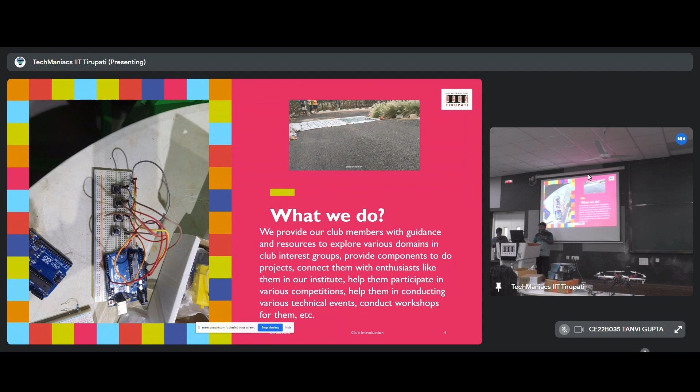The projects we do are open for all, so anyone who wants to join can freely join and learn the skills. We also provide a platform for students to collaborate, so they can work with veterans in that field and gain a lot of skills through hands-on experience. We help students develop technical skills regarding robotics and electronics. Our mission is to induce a technical culture in our institute and boost innovation.

This is the organizational chart of Techmaniacs. I am the co-coordinator, Chirag Kotian — I forgot to introduce myself. There are four interest groups: Arduino interest group, electronics interest group, robotics interest group, and drones interest group. This workshop is for the drones interest group.

We have a head of the drone interest group, Rohit, and under him there are a few co-coordinators who have some tasks assigned to them. Under this is our core team. There are also members in Techmaniacs — a member is anyone who does projects or issues components from Techmaniacs. If you are interested, you can be a member; there is no restriction in that.

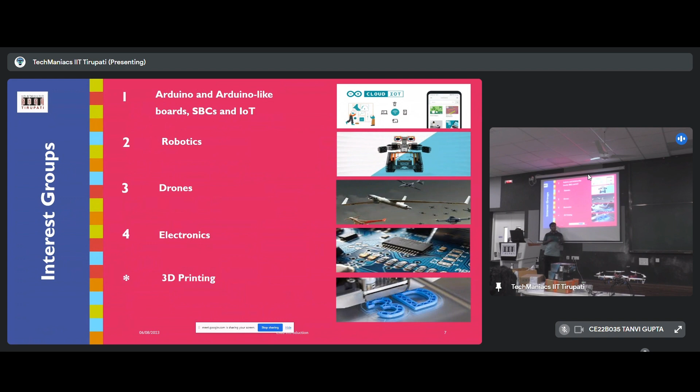As I said, there are four interest groups, and there is an asterisk next to 3D printing because earlier 3D printing was a separate interest group, but we thought 3D printing has become such an important skill nowadays that everyone should learn it. It would be very helpful for making projects, prototyping, anything.

These are our co-coordinators, and you can see their roles. If you want to issue components and do a project under a certain domain, you can contact the respective person. If you have a new project and want to initiate it, you can contact me or the interest group head.

We are also trying to make a document repository of project documentation, so in future if anyone wants to start new in this field, or work upon a project done in the past with advancements, they can refer to that documentation. We will soon release the link to our GitHub repository, where you can find a few projects. It's small now since we started it this year, but as years pass our repository size would increase.

So, how can you be a part of the club? This year's core team member selection is done, so no worries, but you can join us as a member. The benefit of being a member is you will learn from people who have experience in that field. Not only that—

You all know that this December there is the inter-IIT competition between IITs. If you are a good participant in our club and work hard, and the interest group head is impressed with you, he can recommend your names to the selection committee, which can directly select you for problem statements related to inter-IIT. This year's inter-IIT is very hard — it has been promised by IIT Madras that it would be very hardware oriented. So being part of our club will be very helpful in that sense.

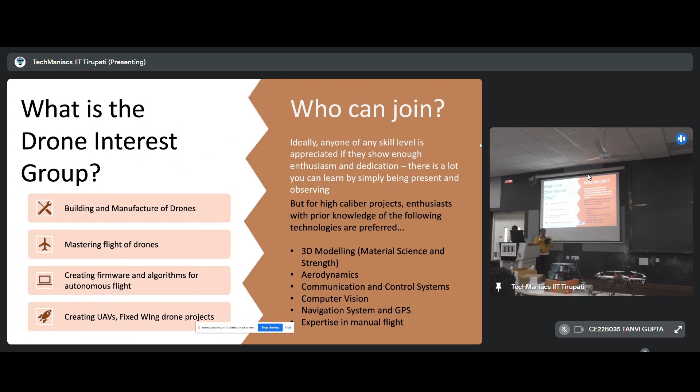And if you guys have some experience in 3D modeling, aerodynamics, communication and control systems, computer vision, navigation systems, GPS, or expertise in manual flight, you will be able to help in the drone projects.

Our mission is to create 4 to 5 projects for IIT Tirupati, and to reach out to some local companies and startups to work upon the projects. First, we will try to reach the inter-IIT projects and all that, to make innovations in the field of avionics and aerospace.

Some of the projects are disaster response. Disaster response is like, we will see what the problem is, and the drone is able to run in those harsh conditions to see the victims and even deliver some aid to them.

The second one is data collection, like wildlife areas, collecting data about the wildlife areas and all. The third one is flight avionics, communication relays, automatic flight, and communication systems.

So when we make projects, we get inspired by a lot of our peers. Newton said he only got that far because he stood on the shoulders of giants before him. So we are also inspired by a lot of projects by foreign universities and other bigger institutes. I wanted to share a video of a drone by ETH Zurich that interested me a lot. I hope you can also get inspired by it.

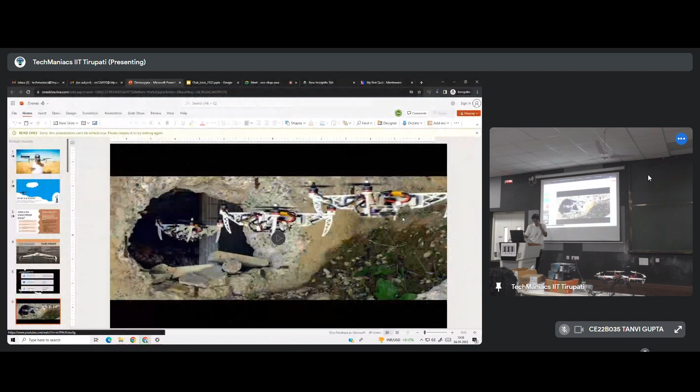Okay, so you can see the video. That's me. That's Prakhar. We made a quadcopter in the second semester, a similar concept.

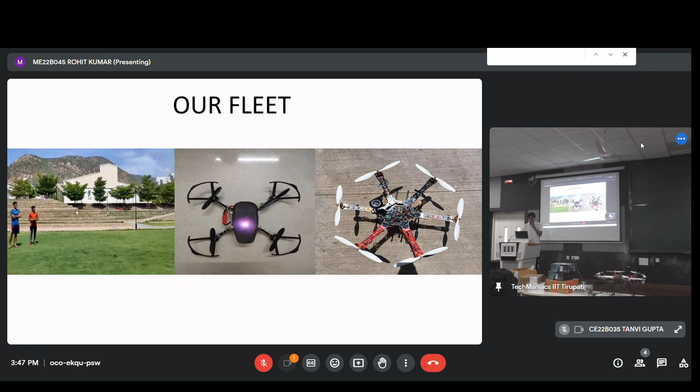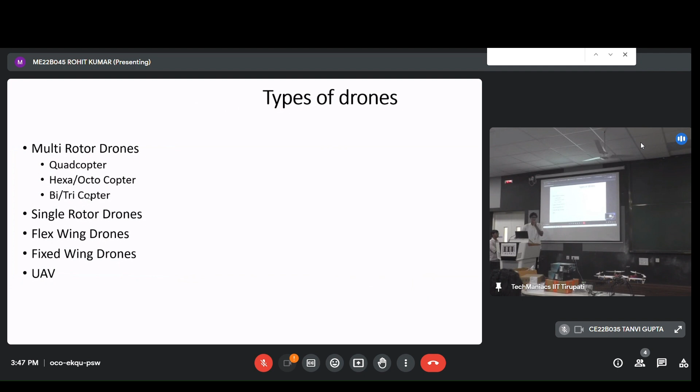There are many types of drones we can make. The most common ones are multi-rotor drones, single-rotor drones, flex-wing drones, fixed-wing drones, and UAVs. They have different uses depending on the use case. Multi-rotor drones are very basic to make and can fly in many circumstances. Single-rotor drones conserve battery and fuel a lot.

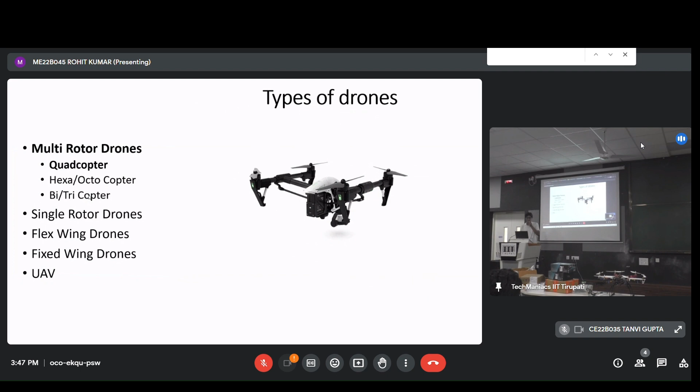They conserve battery and fuel a lot. Of the multi-rotor drones, the quadcopter is the most common type. When you think of drones, the first thing you think of is the quadcopter itself, because it can be modified and made to work under many circumstances.

There's also hexa and octocopter drones. They are a lot bigger and can lift a lot of weight. Other than that, there's also tricopter drones and bicopter drones. They are small, and can be very nimble, very agile.

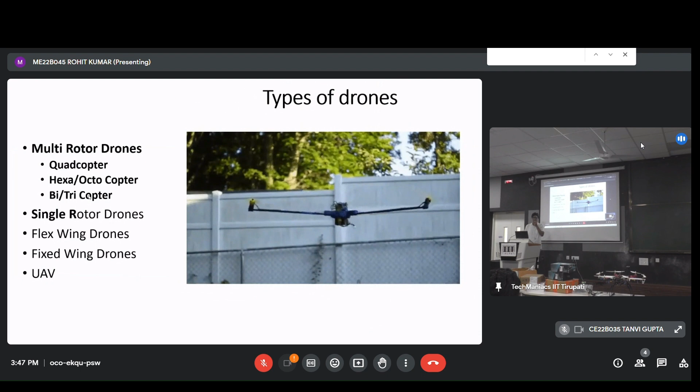Single rotor drones can conserve a lot of battery. They can be made to fly with an engine, that's why they're used for military purposes also.

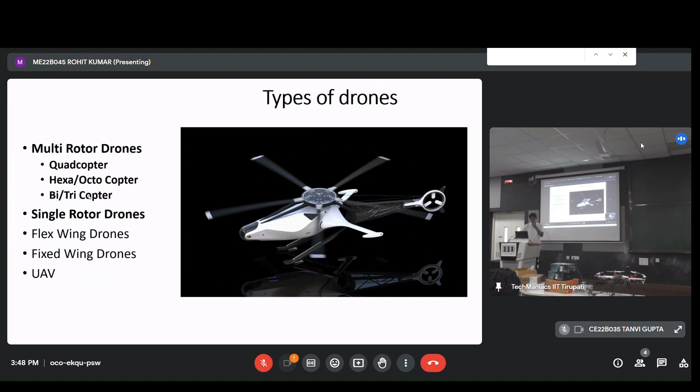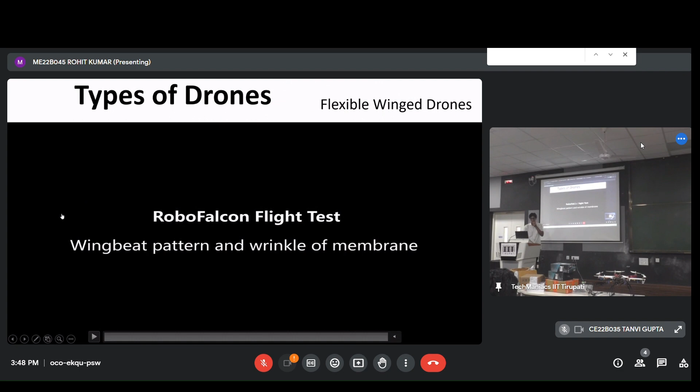Now, flexible wing drones. They are a really interesting project, usually made by research projects. I'll just show you a video to explain how it works.

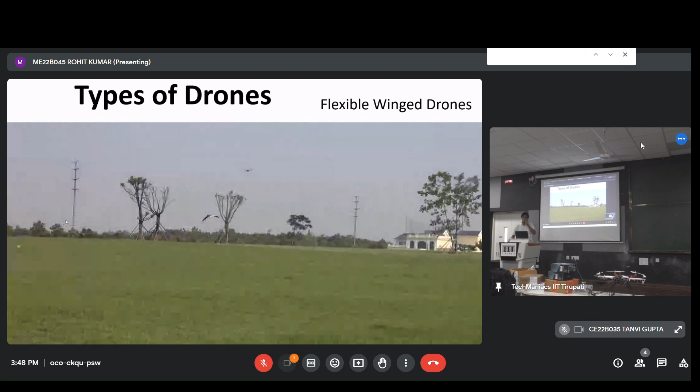So you might have seen Uri the movie. The drone in Uri the movie, that was a flexible wing drone. They can be made to fly among birds because birds aren't distracted by them and they can be camouflaged very well.

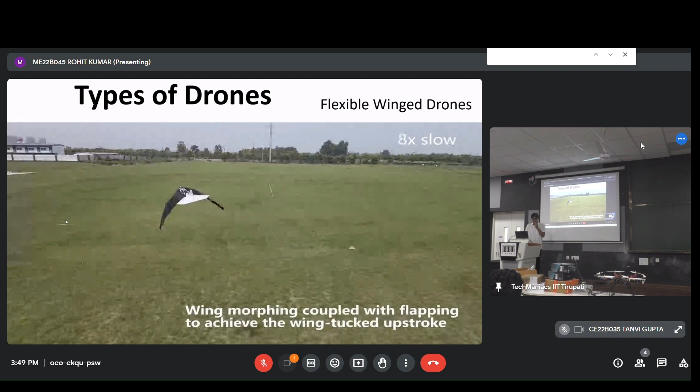Fixed wing drones are basically like a plane. When you think of drones, you normally think there's a spinning propeller, but fixed wing drones function basically like planes - there's one propeller in the back, and the rest is driven by the wings itself. The lift force is generated by the architecture of the wings.

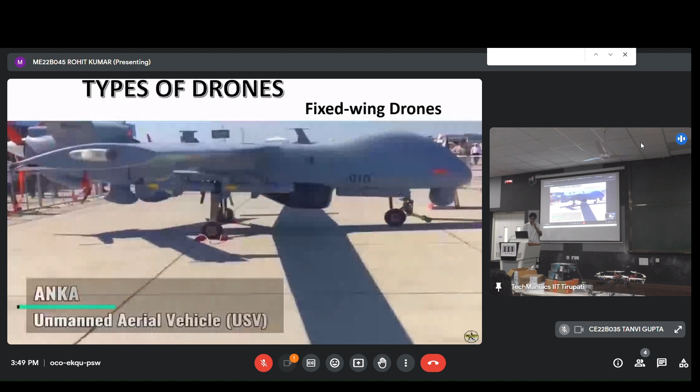I guess we will show you the videos later because the Wi-Fi really isn't collaborating with us.

They can be made to work under floods. There can be many purposes of search and rescue drones, this is not the only one. They can be made to locate victims, and provide medical aid to victims, packages like that.

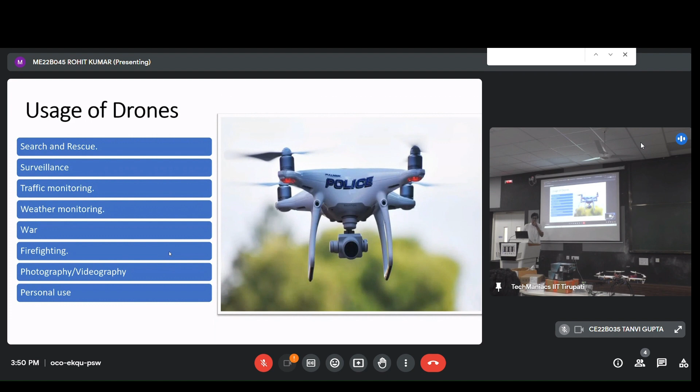This one is a bit dystopian, but in the future you might see police use drones. I think they already use drones in many high risk areas to monitor areas where crime might potentially be happening, where we don't want to assign a police unit to it.

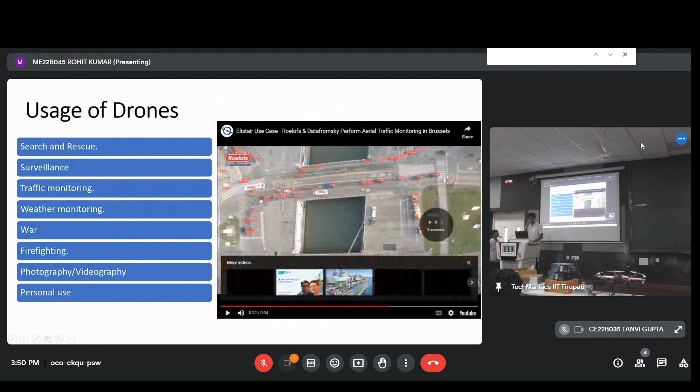One of the other uses, NASA has made this drone - it's a repurposed military UAV, repurposed by NASA. In the USA, every year there's a hurricane hitting, so NASA uses it to live track the hurricane. It can fly within the hurricane itself, so it has a body that's rigid and strong, built to fly in a hurricane. It can provide live real time data tracking of affected areas, and better research on the kind of damage the hurricane is doing.

In the Russia-Ukraine war happening right now, drones are playing one of the biggest parts in achieving air superiority without using a big military jet plane, because those are very expensive, right? But we can use drones to take space in air control.

Now I can't show you a picture of war because that's not ethical - we can't show you a picture of war during a TechManiacs meeting. So I'll show you some Call of Duty footage instead.

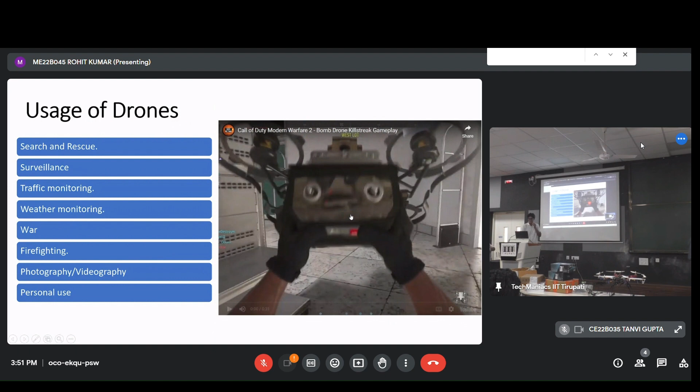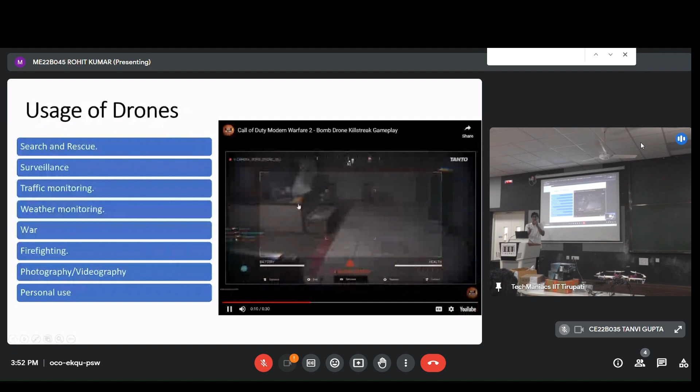Yeah, we will skip the videos, we'll share them with you later on. But I think a lot of you play Call of Duty already. There's a UAV drone in Call of Duty, right? Yeah.

So firefighting - this one is again a video, I'll probably not play it.

They made it to autonomously detect fires, and it's powered by a pipe - powered by the fire hose. The thrust isn't generated by the motors; the motors are only there to provide direction to the pipe. The thrust is provided by the opposite reaction from the force of the pipe, the water thrusting through it.

So it's connected to a fire truck. It can automatically fly to the highest story and fight fires from the top down. Currently, we have to supply firefighters from the bottom up, which can take a lot of delay in saving people who are high up in the upper stories of a multi-story fire. If the fire breaks out in a multi-story building, drones can help people who are in the upper floors as well. Now the next video is - how many of you have seen the freshers introduction video?

Yeah, they have a DJI photography and videography drone built specifically for this purpose. They take many shots of our campus like this. Even during Tirutsava, they have a drone that specifically records performances and things like that.

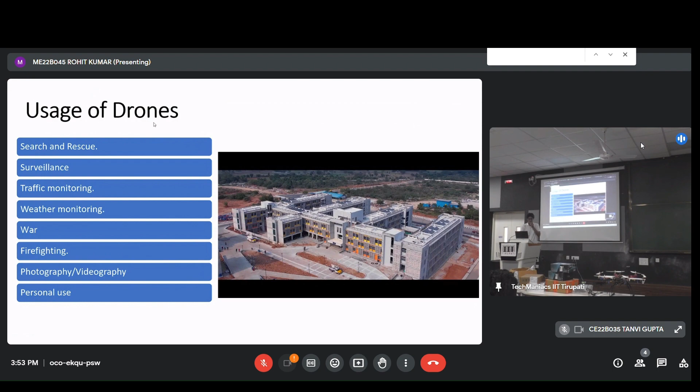Next is personal use. A drone is just a flying object, right? We can make it do anything. So here's a personal use of drones. We can...

Now I'll tell Rohit to tell you about the components of drones and how to technically make them.

So you have seen many types of drones here. Can you tell me how many types of drones have you seen till now? Summarize. So how many types of drones have you seen right now? Can you name some of them?

No, UAV is just a completed drone. UAV is a category. Flex wing, then fixed wing drone, then quadcopter - in which category does it fall?

Single rotor. Okay, so first of all, the most common is multi-rotors, where we use more than two motors. Next, flexible wing, where we have a particular membrane which creates a lift force.

Lift force, how many of you know? Okay, then we have a fixed wing drone, in which if I...

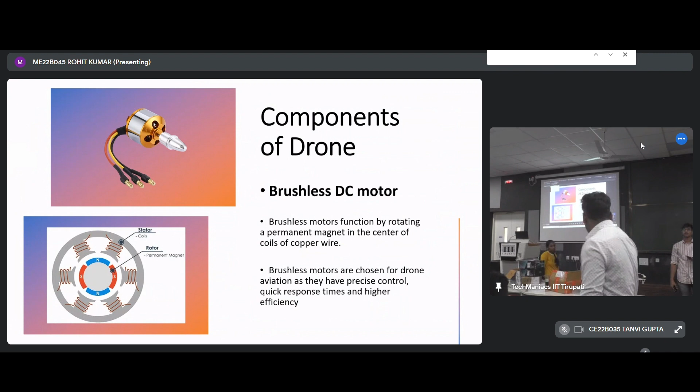Divyam, you guys come in front.

Okay, we are not assembling it right now. You have to come to me or contact us. We'll make something new, this is the old one. Maybe I'll be giving you a guide, like I'll describe it.

Okay. Hello. So can we start again? You just share among yourself.

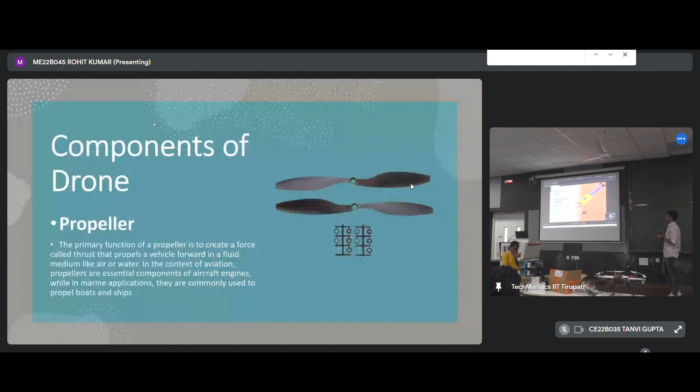Okay, first we saw a frame, right? It's similar to which you have in your hands, right? So this is a glass fiber, which is enough strong.

Okay, so have you got the upper plate? This black with golden tilt. Okay, and the lower plate - this is called a PCB plate, which has a circuit, an inbuilt circuit.

Can I get your attention? Okay, so this is a circuit, we attach a battery directly to the lower plate. You can see some lead tin alloy, some kind of thing.

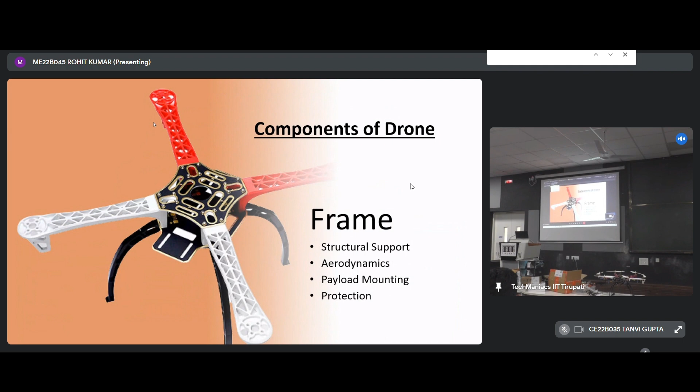Okay, so next thing we have are motors. How many of them have you got? Okay, so usually we use BLDC motor, which is called brushless DC motor.

The reason is they have high speed where they have low torque. Like torque is enough for propelling, but compared to a DC motor where the rotor is inside the motor, in this motor the outer part is rotating.

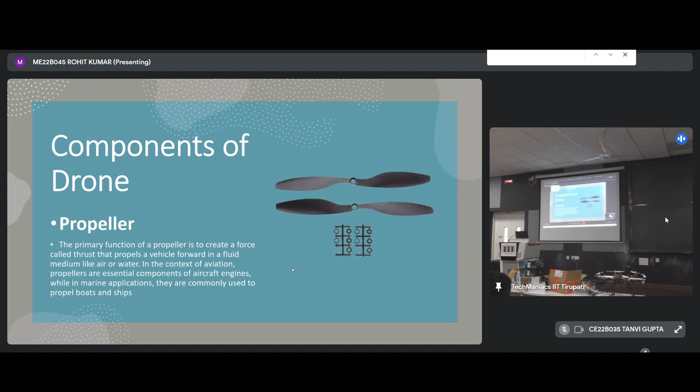Next, it's written as 13T. 13 is 13 turns per pole. Pole - so this is the pole, right? There will be 13 turns in this.

The more you increase the number, the more torque you get, but at what cost - you will lose speed. Okay, so propeller, motor, clear.

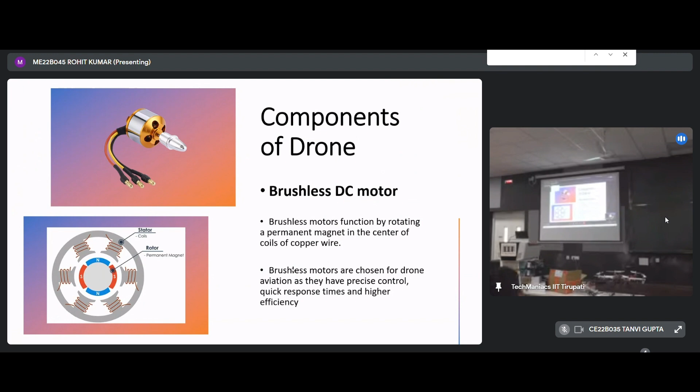Next we come to ESC. We can't give 11.1 volts every time, we have to decrease or increase it based on time, because there will be deflection. Without deflection we can't fly. So 11.1 volts is the maximum.

Like a battery we use of 11.1 volts, it can charge up to 12.6. Each cell has a 3.7 volt nominal voltage, and that will charge up to 4.2 volts. We usually use three cells.

So can you tell me the function of any one of them? Orientation in what aspects? Okay, can anyone tell me about the barometer? Okay, then we have accelerometer.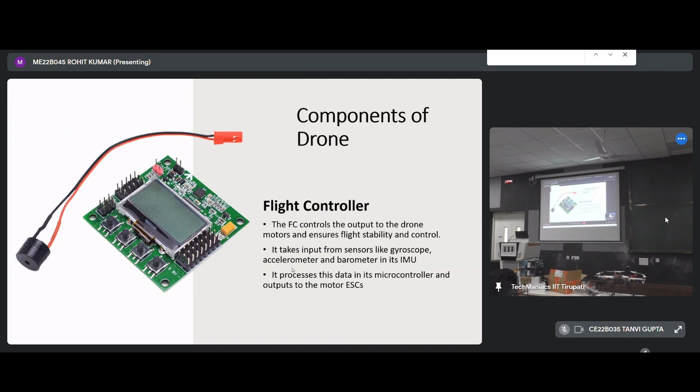The first one is for ground, the second one, red one, is for positive 5 volts or different volts, and the third yellow one is for signal. So how do we connect them? Okay, I was thinking you should guess, but the inner side is usually a signal pin.

It can vary in different flight controllers. Okay, so in this flight controller we can connect up to 8 motors, which can be a servo motor or a DC motor, depends on your requirement, what you are making. These 4 buttons are for configuration of this display.

Clear? Then the other side. Okay, so our drone is flying in the air and we are giving a constant velocity, like lift force, it's flying. How will you make it go lower, upper, sideways, and whatever orientation? Okay, so here we connect a receiver, which is connected wirelessly to the transmitter.

Okay, so till now everything should be clear, I guess. Is there any doubt? If any, you can ask me. Okay.

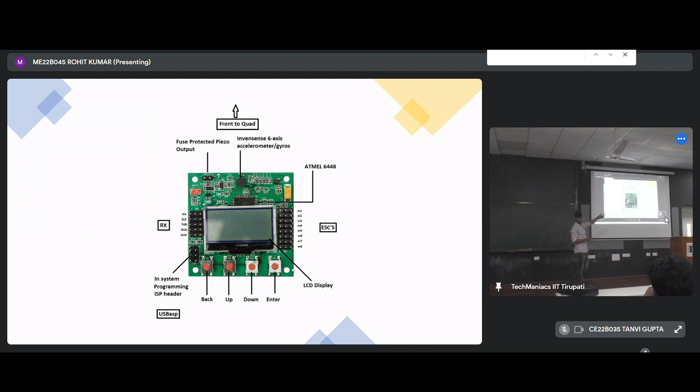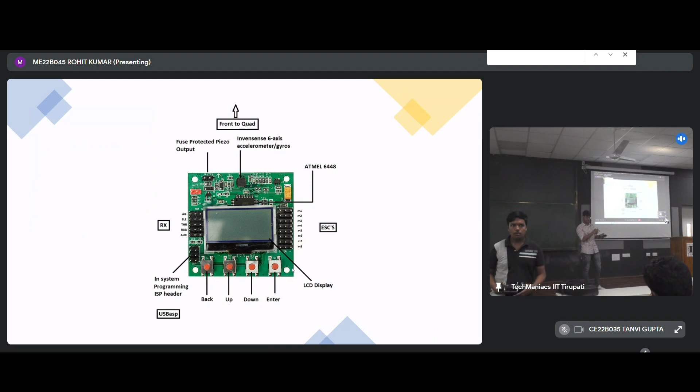The left side pin, here again we have positive, negative, and this signal pin. I'll tell you the orientation in the next slide. Transmitter, receiver, clear? If no, you can raise your hand.

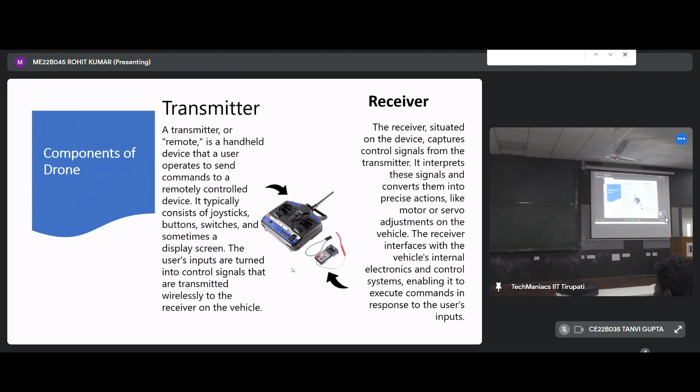So for powering the drone we definitely need something, we can't directly add electrical, like our motor is electrical.

So we usually use lithium polymer battery because of its low weight and high efficiency. We do have another specification: nickel metal hydride, nickel cadmium, lithium polymer, lithium ion. Most probably we will be using lithium polymer in most of the cases.

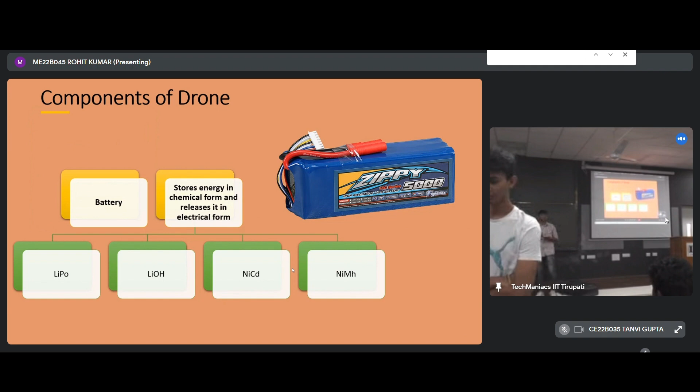So what is the primary function of battery, can anyone guess, how it works? Okay, so the battery turns chemical energy into electrical energy, then that electrical energy goes up to the motor.

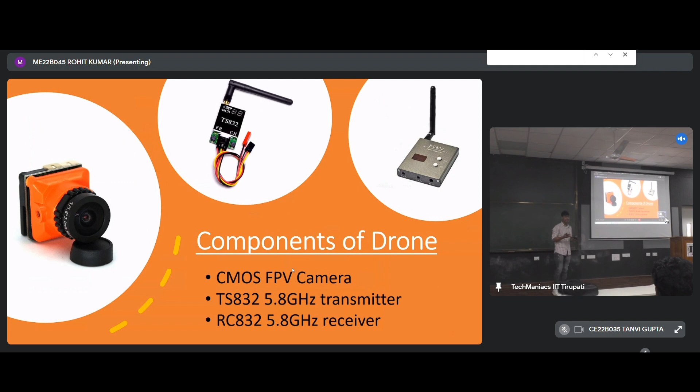This is a camera, it's optional, if you want to add it, we can add it, depending on us. So this is a circuit, the flight controller I showed is a basic one.

The flight controller we are using is a Pixhawk, which is an advanced form, here you can upgrade yourself, upgrade your drone to fly autonomously, you don't need to fly with your hands like with remote. You just have to give coordinates and it will follow that path, I'll try to explain with that.

Then that is Raspberry Pi, have you seen that? Raspberry Pi is again a computer, microcomputer you can say. In the earlier video you saw that shape changing drone, how was it working? It's on this, you program it, it's again a component adding more brain to it.

Next we have telemetry kit, again a controller kind of thing, if you need to override it sometime you can do it, otherwise this is a telemetry, you can monitor your drone.

If it is high precise, if it is out of your reach, out of sight, you have to use telemetry, it will give a proper specification of your drone, how it is flying, at what altitude, at what range, how you should operate it. Otherwise if the connection fails, how it works, everything you can control with telemetry.

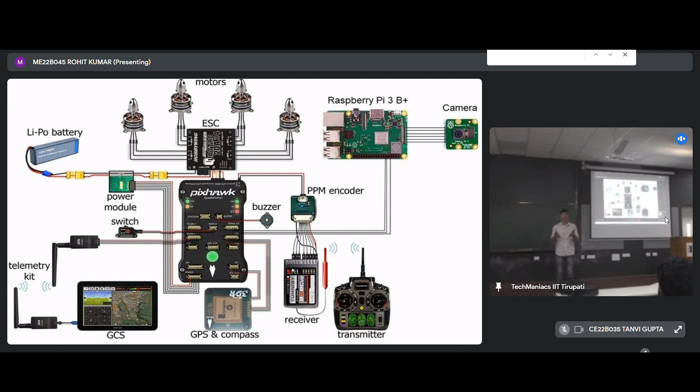So how does a quadcopter fly? Like we took an example of quadcopter, right? Throttle, thrust. Throttle is you are giving constant velocity to each motor.

Then same like we have pitch, roll, and yaw. Let's just fix some coordinates. This is the z-axis, we take it as the y-axis, you and me, this one is your x-axis. So throttle, if we are giving the same speed.

Same speed, so it will throttle up with the lift force we are using. If the lift is less than the drone weight, how will it react? If it is equal, and if it is more? So the lift is clear, right? I'll talk about the thrust also.

Pitch, front and backward, you and me, that's going to be the direction, that's your axis. You're clear? Anybody else? You're clear.

Then we do have a roll. Yes.

Let me show you something similar to that, if you are not clear. So why are we using counterclockwise and clockwise, two different directions of motors? In what aspects? Why are you balancing it?

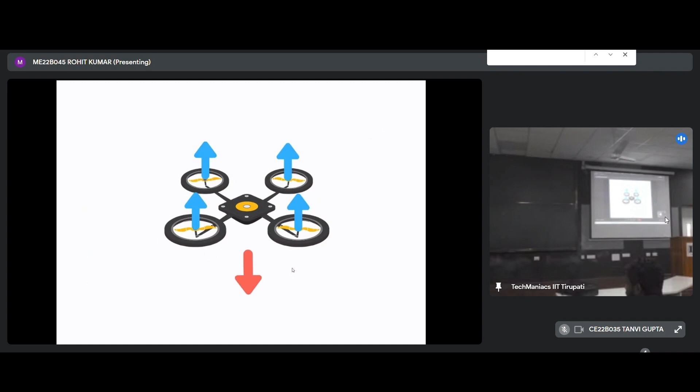Let me show you a live one, if possible. For now, I am giving equal constant velocity to each and every motor. Right now we have a quadcopter, but we are not using a BLDC motor, we are using just a DC motor with micro motors, usually dimension 720, 7 by 20.

So propulsion, everything is clear from that. I'm just elaborating this, so we fixed up some coordinates and I'll fly according to that. I just took off with equal constant velocity in all propellers.

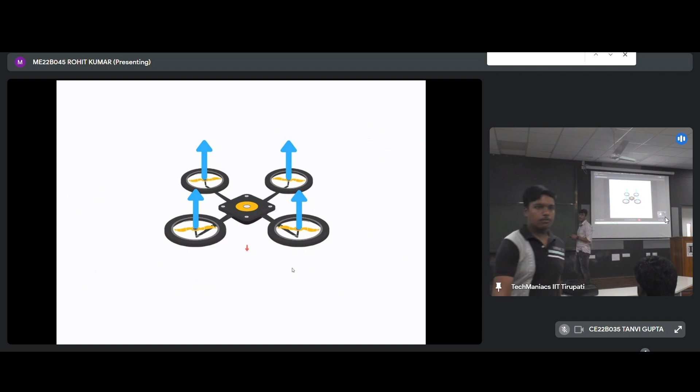These were some things which are essential before you begin with drones. If you're not clear, you can ask me right now. I'm going to provide a guide on how to select components for each and everything, if you're interested go through it. We'll start with, I'll show you some projects. You have to choose your domain and come according to that.

Probably we'll be taking some problem for you to think about. So I think there are no questions. So can we have a quiz? Yes, sure, Tanvi.

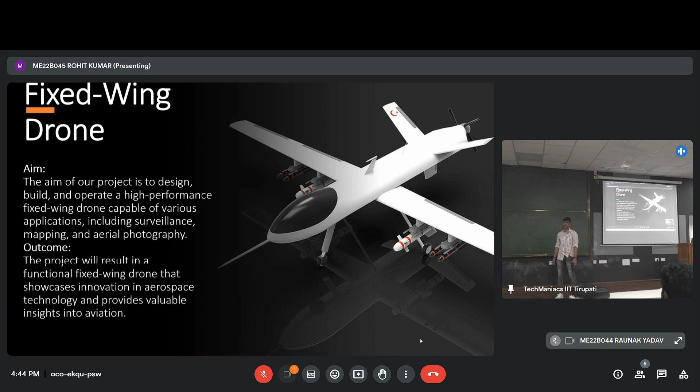Is that clear? Okay, drone show. We do have multiple events in our campus. How can we represent ourselves? Like we have some technical things. Any idea? How can you represent your drone in such a way that it feels attractive to everyone?

Banner, you are talking about banners, some banner written was... that's again a good idea. But again, the specification we have to recalculate and everything we have to add. So this is a drone show, we'll be having some team for that. The smoke one is already decided, the banner one is already decided.

So you can't directly rely on that autopilot, so you will be pilots also. Not for now, but at a later stage. Is this clear? This earlier one?

Racing drone, have you seen that? From the side, have you seen a racing drone? If you have observed it, we don't have this much size of propeller, this much size we don't have, and we don't have particular directions for that. This racing drone is a freestyle drone, it can move.

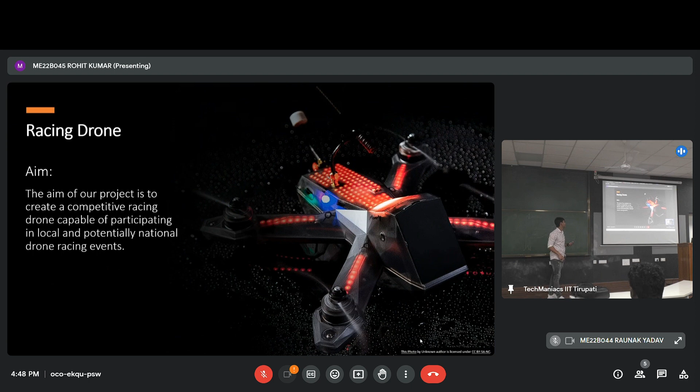So a question to you: what is the basic rule of upgrading anything? Any more points? Okay, for upgrading, these drones are already available in the market, people are using them, the authorities are already using them. So there's no meaning in making the same thing. Upgrading means we have to reach that point, it can be long term also, it can take up to 2 years or more, you have to handle it later on.

So this is a drone which needs better payload, better material type, better propellers, everything should be better, and it should work in harsh conditions also. Situation can be anything, you've seen that shape changer one, it was going into a cave, right?